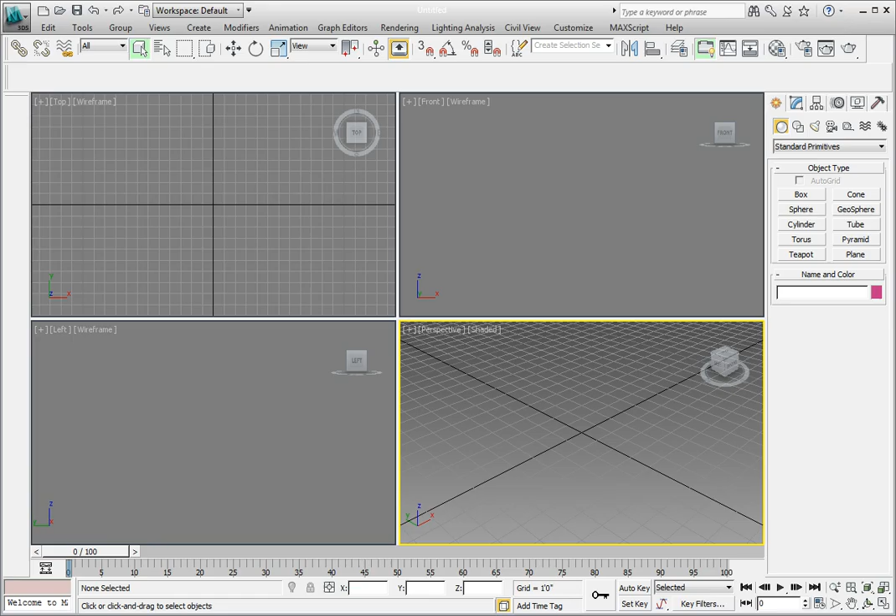Let's learn to use the Print Size Assistant. We'll begin by opening 3ds Max, then opening a file. Click on the Application button, Open, navigate to the Chapter 13 subdirectory, open the file Chapter 13 Panorama01.max. We're not actually going to print this right now, but we'll use this file as part of this chapter.

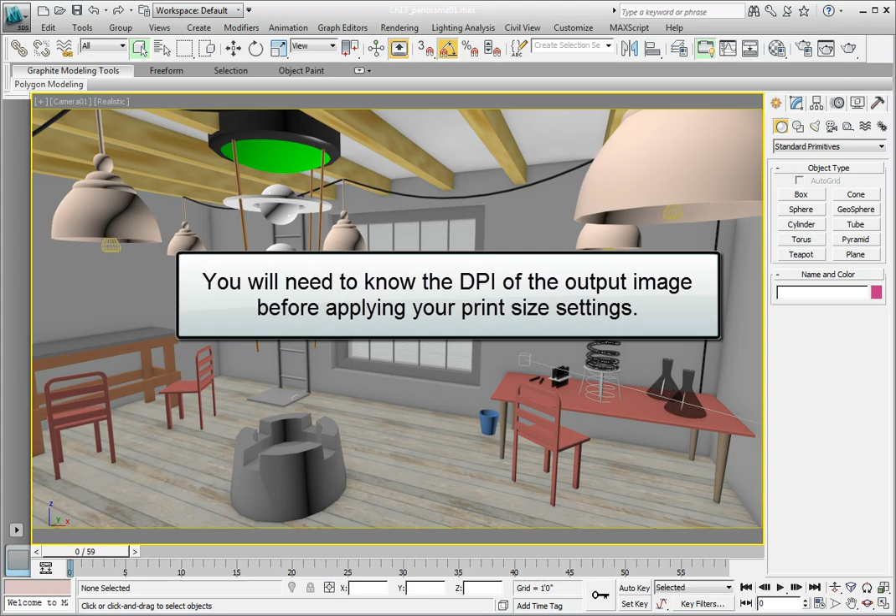Two pieces of information you need to know in order to use the Print Size Assistant for calculating the resolution of images for print. You need to know the DPI rating of the image that you're going to be using for printing. Again, remember, this is not the resolution of the actual printhead itself. It's the pixels per inch of the image that's going to be fed to the printer. We also need to know the size of the printed end result.

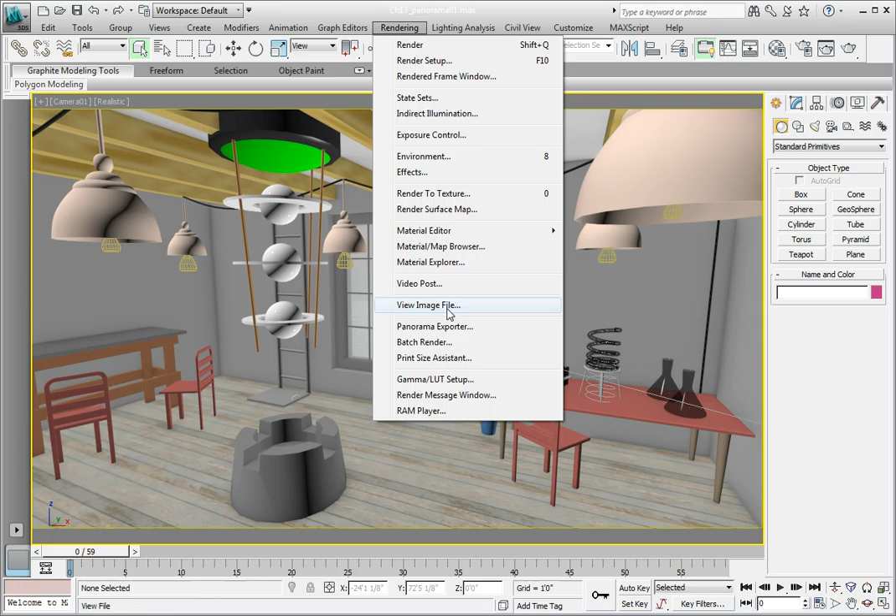Go ahead and make sure the camera viewport is active, and we'll set this up as if we're going to render for a print job. Click the Rendering menu and select the Print Size Assistant from the Rendering dropdown. This opens up the Print Size Wizard dialog box. This interface allows us to choose the paper size, so let's take a look at what we can select from.

We have some standard sizes like 8.5 by 11. There are European and US standard sizes. From the drop-down list, select the B size. So we'll print on a 17-inch by 11-inch sheet of paper. Then we need to choose the DPI rating that we've gotten from the printer who will be running the print job. Are we going to deliver them a 72 DPI image or a 300 DPI image? Currently it's set to 200 DPI.

We can enter any value we want, and remember, it's important, don't look at the manufacturer's specs for resolution of the printer. There are printers that have a resolution of 2400 dots per inch, and some are higher. Now, you wouldn't want to type in 2400 DPI for this print job. That would be a little overkill because most printers don't print one dot on the paper for every dot in the image.

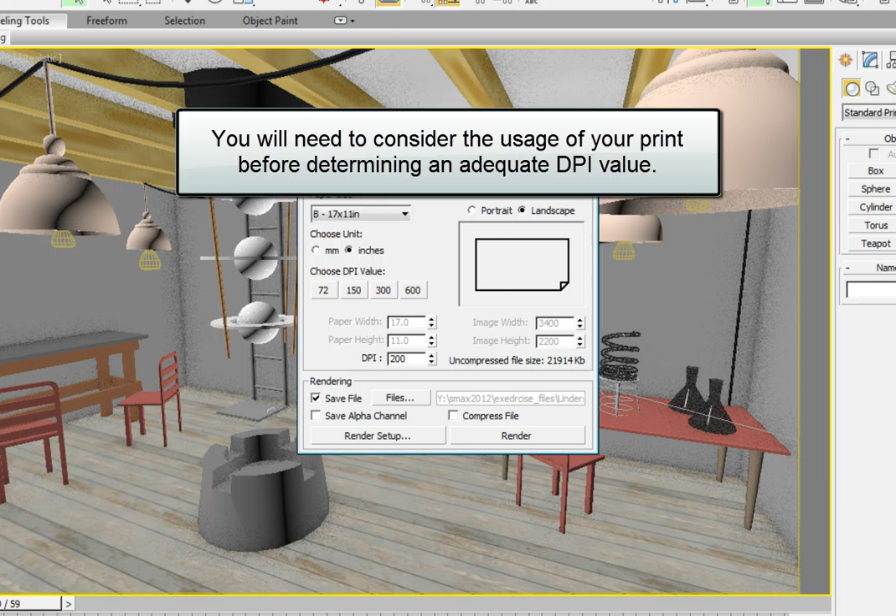An example of why you would want to type in the value is if you're printing for a billboard size image, like the outdoor advertising billboard you see on the highway. Those are usually created around 12 DPI. Again, keep in mind the viewing distance we discussed earlier. We're going to assume that our printer requires 150 DPI resolution for the particular image that they're going to be using. Go ahead and click the 150 DPI button. This will then calculate the resolution to be 2550 by 1650 pixels.

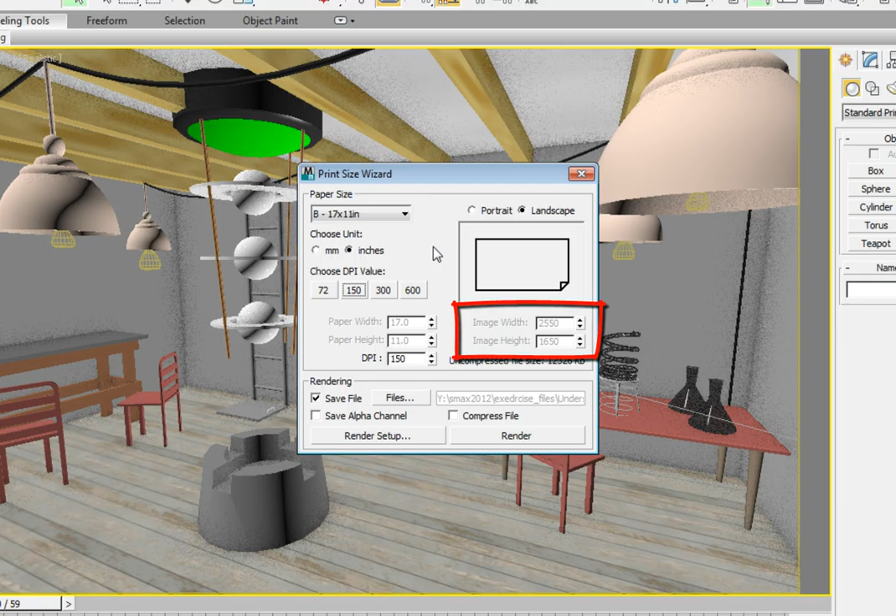It also allows us to pick a file. Click the File button. This should bring you to the top level of our current project folder. Since we're not actually going to go and render this, we don't need to type in a name. But you'll notice that if we use the Print Size Assistant to render the scene, we can only render to TIFF files. This is the preferred file format for most professional printing companies. Go ahead and click Cancel on the dialog.

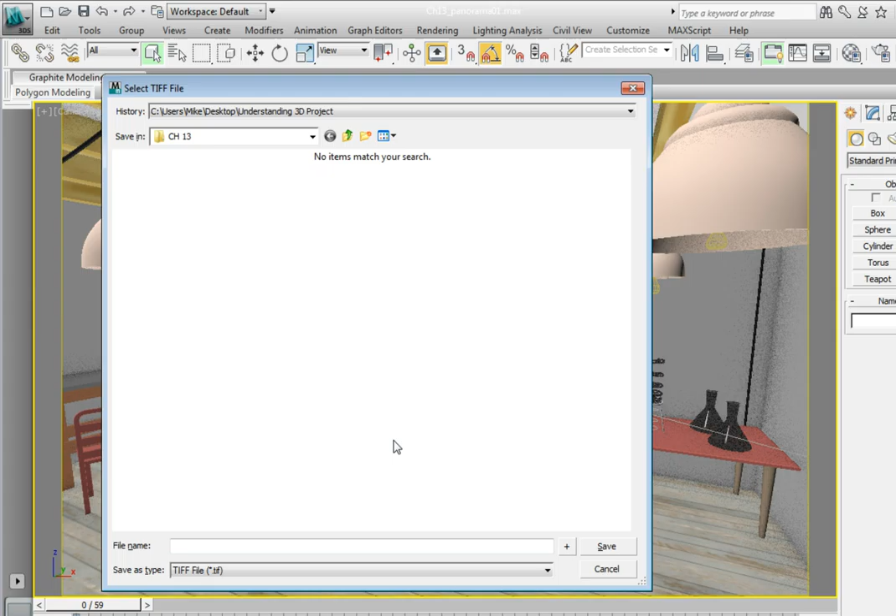We have two options in this dialog to render. We can either render to the file that we just specified, again by clicking the File button and naming a file somewhere on our hard drive, and then clicking the Render button at the bottom right of the dialog. Or, if you want to have a little bit more flexibility in how you render the image, you can click on the Render Setup option. Go ahead and click on the Render Setup option.

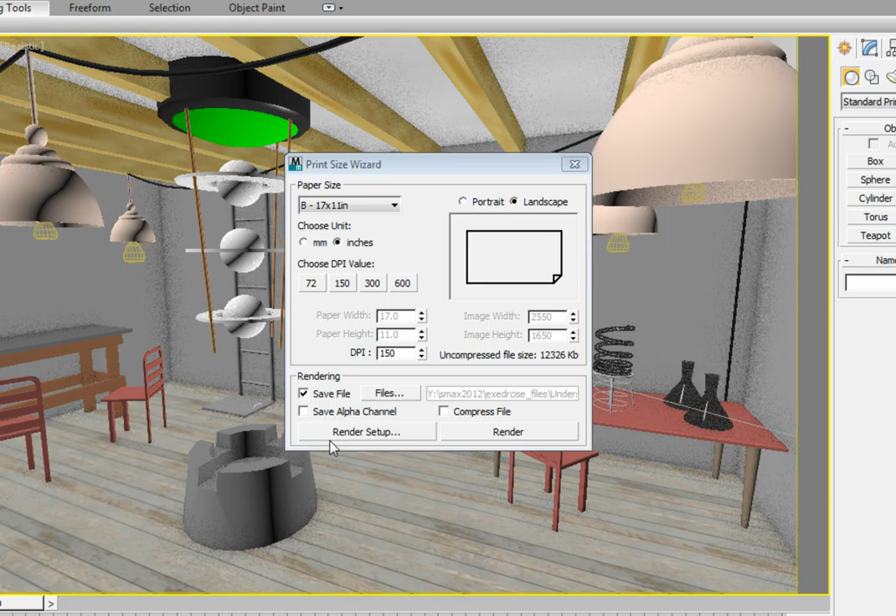That opens the Render Setup dialog, and you'll notice in the Output Size area that the width and height values have been entered for us. We can then use this dialog to configure the renderer and save the file to a type other than a TIFF file. This is a very good tool to start with if you're going out to print resolution and are not exactly sure what size image you should render.